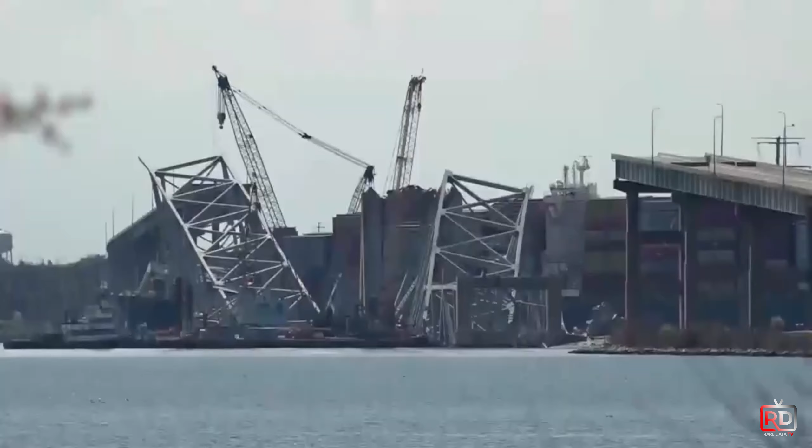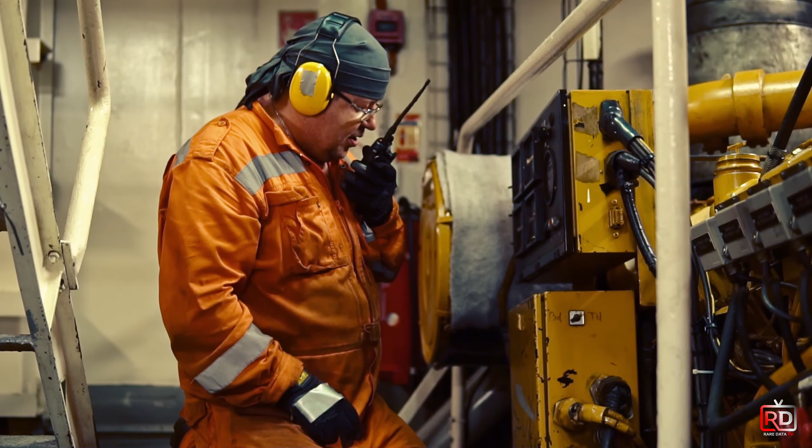A short time later, black smoke was seen coming from the chimney, indicating that the backup generator had started. However, the propulsion engine was completely lost at 1:26 a.m. The Maryland Department of Transportation was notified by the ship's crew of the incident and the possibility of a collision. Traffic was prohibited from crossing the bridge from both directions 30 seconds before the collision.

Following protocol, the captain dropped the anchor to prevent the collision, but with the immense inertia of the ship, nearly the length of 3 football fields and loaded with containers, it still lumbered towards the Francis Scott Key Bridge, to the helplessness and despair of those on board.

At 1:28 a.m., the ship hit the bridge's support pier at a speed of approximately 8 knots, equivalent to 15 km/h. 4 seconds later, the steel bridge fractured into multiple segments and collapsed completely.

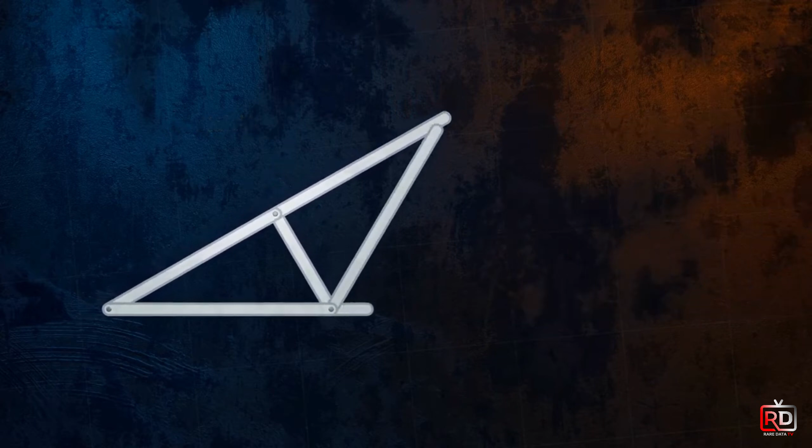The Francis Scott Key Bridge is a continuous truss bridge built in 1977. It is called a truss bridge because it is supported by a steel truss frame consisting of a series of rigidly connected triangular blocks. It is called continuous because this steel frame extends continuously along the entire length of the bridge, helping to distribute the load evenly throughout the structure.

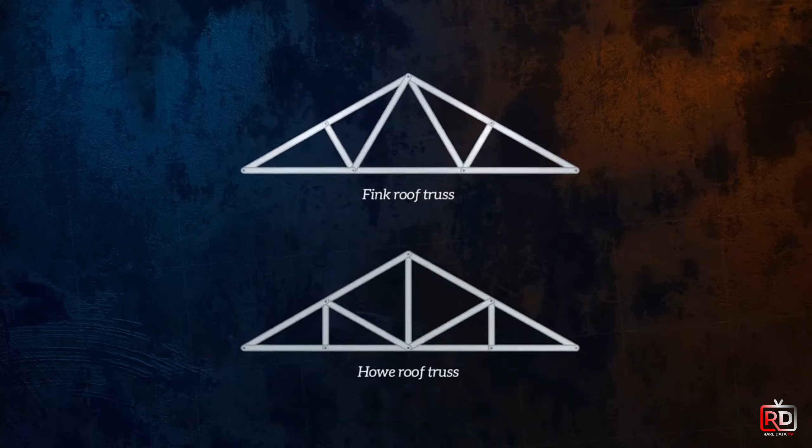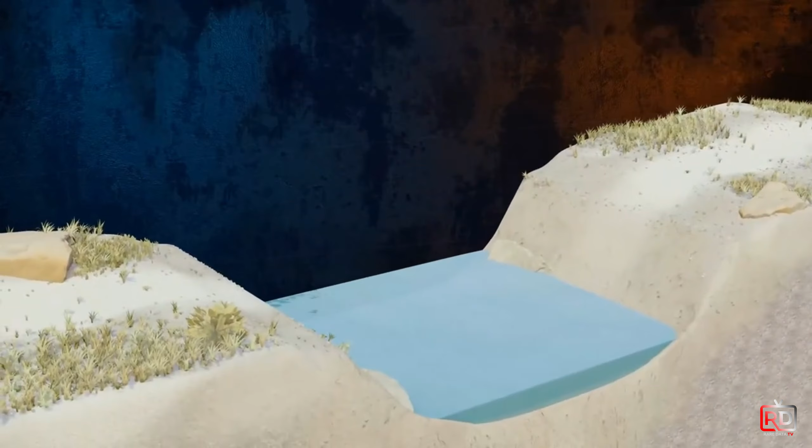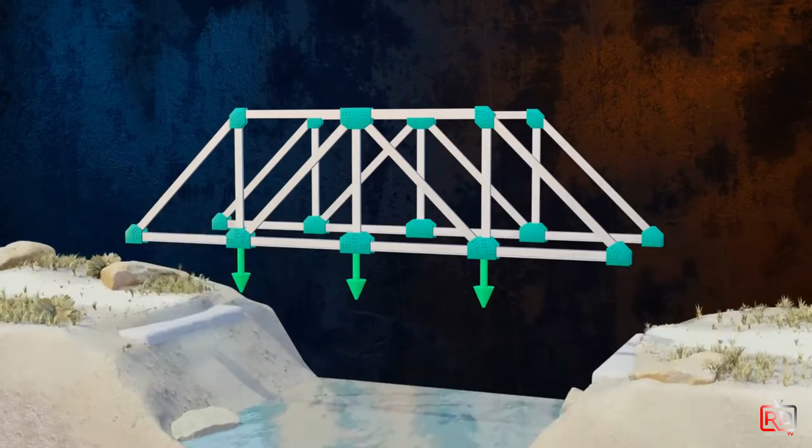The triangle represents geometric strength, and even the incredibly strong arch structures we often praise are just a weaker version of the triangle. In addition, continuous truss bridges allow for crossing large rivers without the need for additional columns or support structures in the middle of the span.

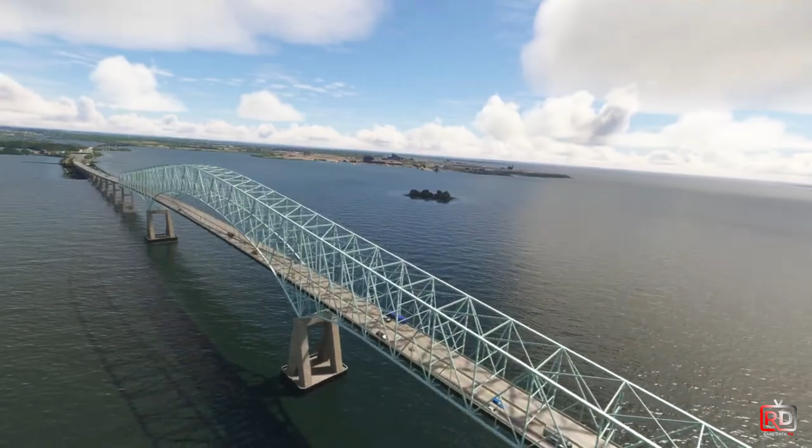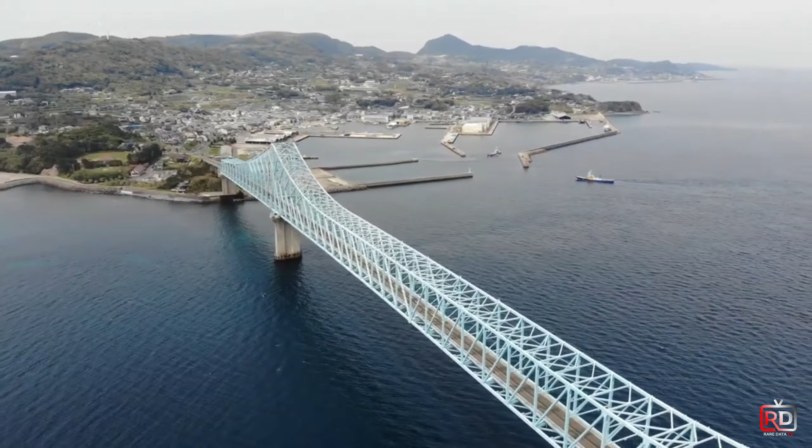The total length of the Francis Scott Key Bridge is 2,632 meters, and the main span is 366 meters, making it the 3rd longest continuous truss span in the world, after the Astoria Megler Bridge in the US and the Ikitsuki Bridge in Nagasaki, which are 376 meters and 400 meters long, respectively.

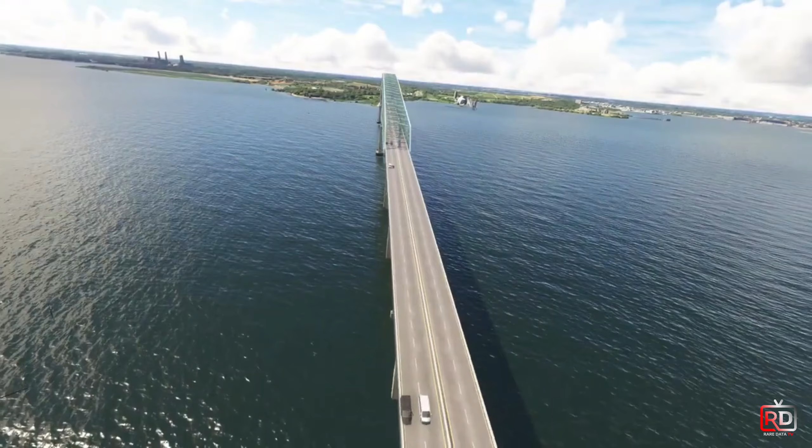However, the Francis Scott Key Bridge also had design flaws. It is not entirely accurate to call them flaws. It seems that the engineers designed this important bridge with a defense system that was too weak to protect the piers from rogue ships. The engineers came up with a 2-layer defense system.

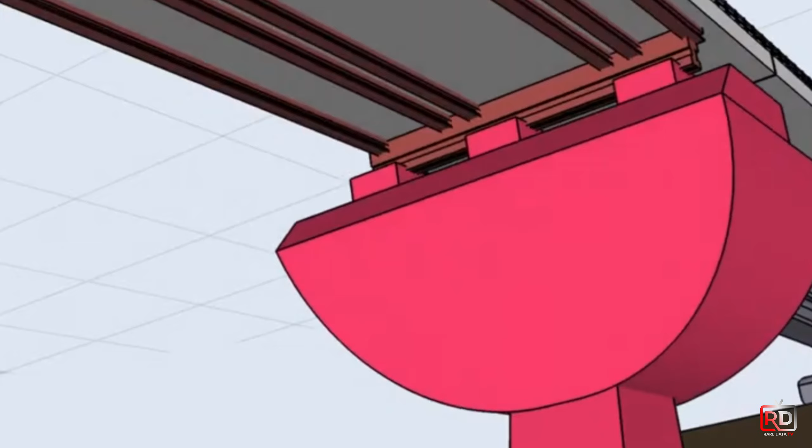The first layer consisted of dolphins, which are concrete pillars driven deep into the riverbed in front of and behind the pier to deflect oncoming ships or absorb the impact of a collision instead of the pier. The second layer of defense was the fender, which is similar to the bumper of a car. And just like a car bumper, the fender can only withstand collisions with small boats.

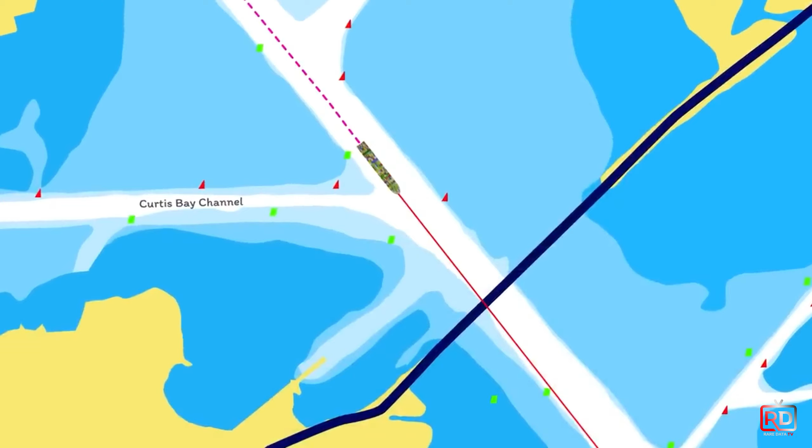The fender system on the Francis Scott Key Bridge was even too small to be clearly visible from a distance. The fenders of many other large bridges are much more sturdy, larger, and more prominent. Meanwhile, the 300-meter-long container ship weighing 100,000 tons hit the pier with a force equivalent to about 20,000 tons.

It is also worth noting that at the time the bridge was built over 45 years ago, cargo ships were much smaller. The engineers did not design the bridge to withstand a direct hit from a large ship like the MV Dali. To put it in perspective, when fully loaded with containers, the ship weighs the equivalent of 20,000 adult African bush elephants or 10 Eiffel Towers.

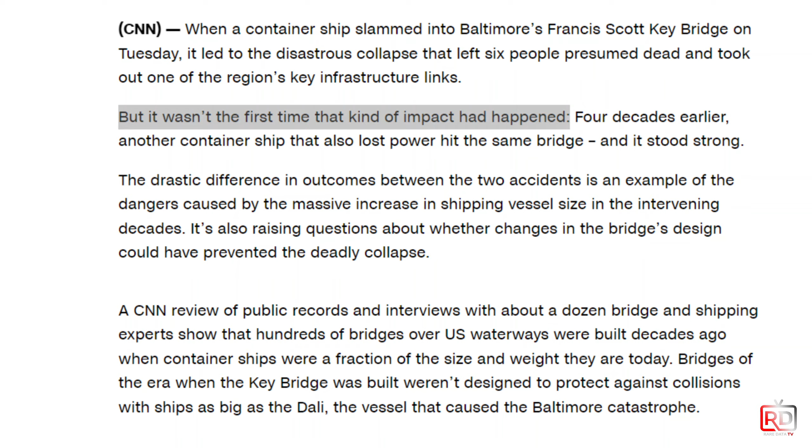History has shown that the Francis Scott Key's defenses were inadequate. In 1981, a Japanese freighter also hit a pier of the bridge, tearing off a 10-meter section of fender. However, it only shook the concrete of the pier. This means that the Francis Scott Key Bridge was not adequately protected by today's standards.

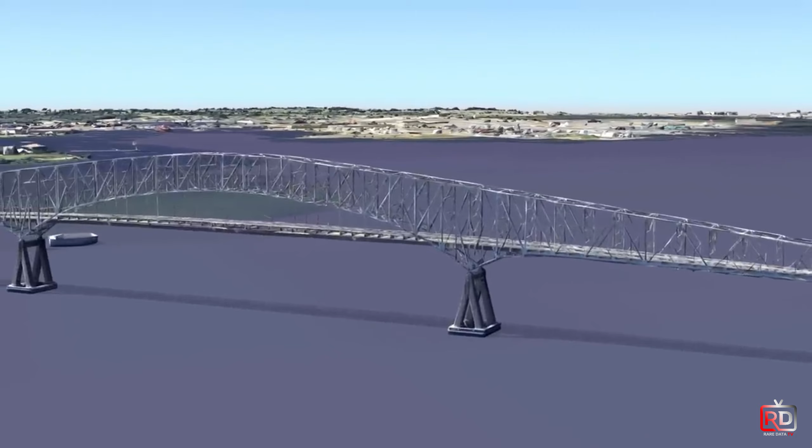According to a 2018 report, there were 35 collisions that led to the collapse of major bridges between 1960 and 2015. It is also from these accidents that modern bridges today have become much safer. They have larger spans, and the piers are further apart, reducing the risk of collisions.

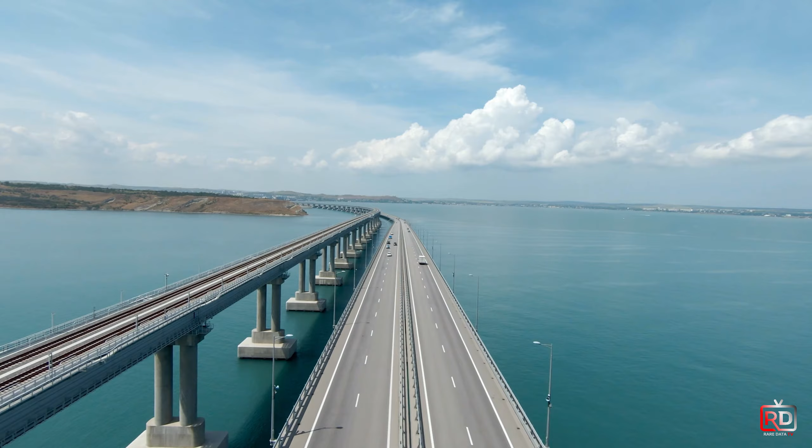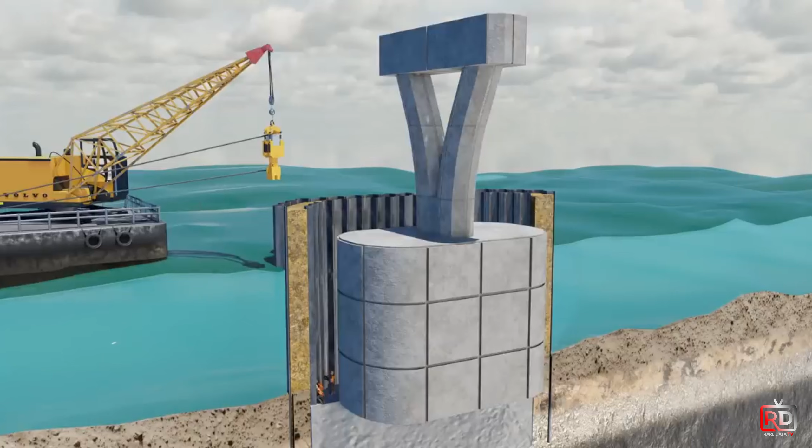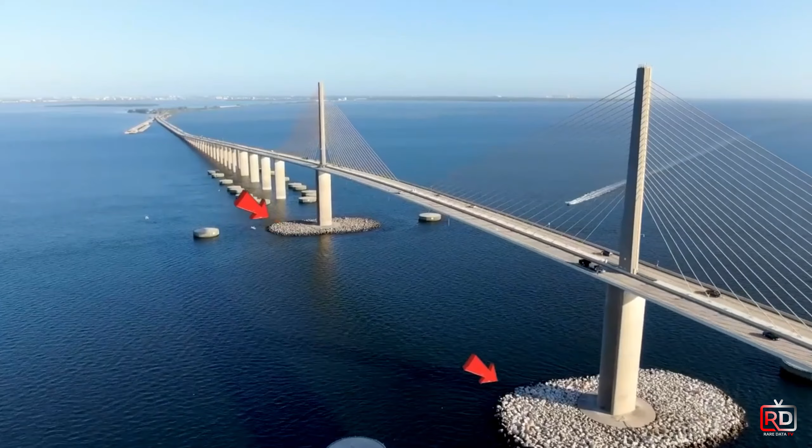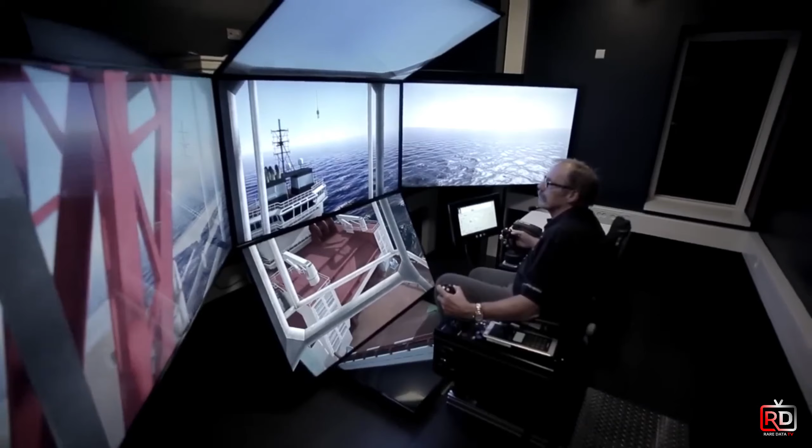The dolphin piles are made larger and spaced closer together, and the fenders are also enlarged and redesigned to be more robust. Combined with super large, super strong pier reinforcement, it is enough to withstand any type of ship when needed. In addition, some artificial islands are built around the piers to cause ships to run aground and stop quickly, dissipating their kinetic energy. Advances in positioning and navigation technology have also significantly reduced accidents caused by human factors.